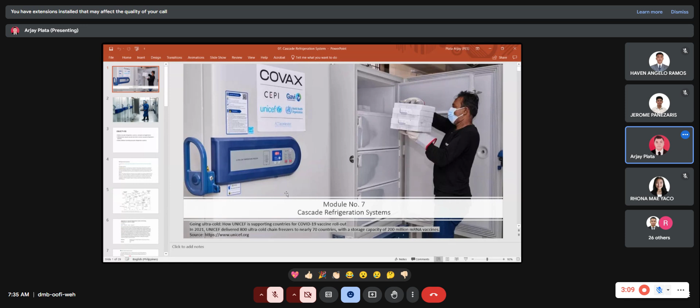As you can see on our screen, this is another example of ultra cold chain freezers delivered by UNICEF to Ukraine to increase capacity to receive, store and distribute large quantities of COVID-19 vaccines. It requires ultra cold storage. This type of freezer uses two independent systems or two refrigerants in order to achieve the ultra low temperature.

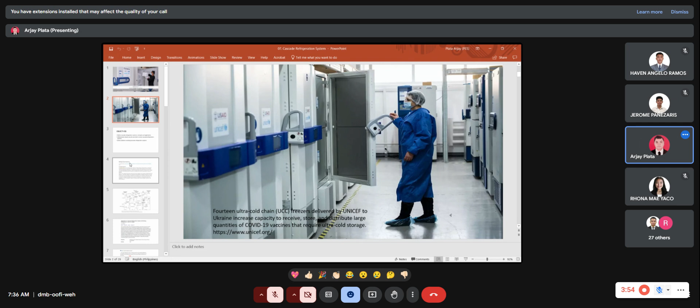Our objectives for today: first, define cascade refrigeration systems, concepts and application; differentiate closed cascade and direct contact cascade refrigeration systems; and solve problems involving cascade refrigeration systems. That's our objective for today.

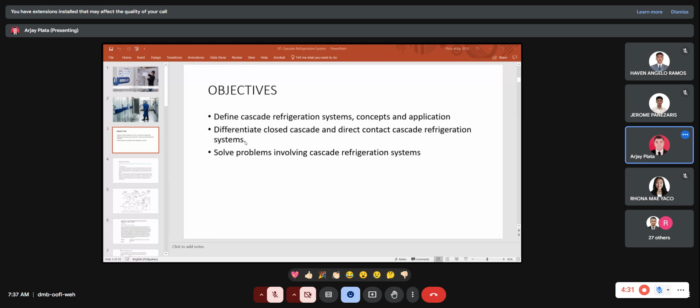As I have said, cascade systems use one refrigerant to condense the other primary refrigerant that is operating at the desired evaporator temperature. It means that it uses more than one refrigerant. This approach is usually used for temperature levels less than negative 80 degrees Fahrenheit when light hydrocarbon gases or other low boiling gases and vapors are being cooled. To obtain the highest overall efficiency for the system, the refrigerants for the two superimposed systems are different.

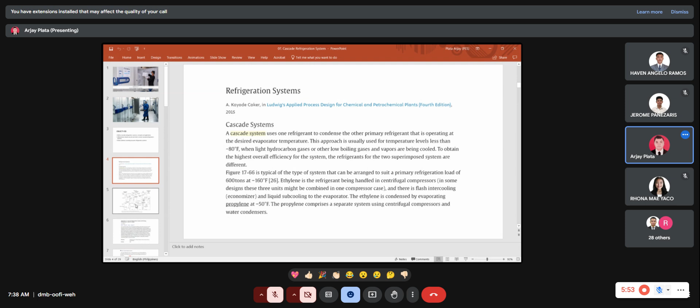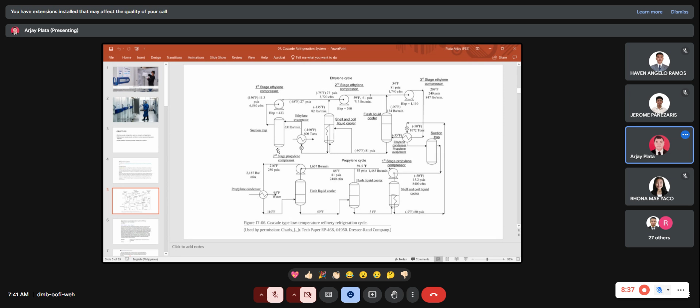There are also some studies that apply cascade refrigeration systems, which I provided in our module. The first one is the application of cascade refrigeration systems with mixing refrigerant in cold air cutting, published in the International Journal of Modern Physics B. You can also check other studies that apply this cascade refrigeration system.

In this study, it is a mechanical cutting process. In the mechanical cutting process, replacing the traditional cutting solution with cold air can avoid pollution of the environment. In order to refrigerate efficiently and flexibly adjust the temperature of the cold air, it is necessary to use a cascade refrigeration system to supply cold quantity for the compressed air.

The introduction of a two-component non-azeotropic mixing refrigerant into the cryogenic part of the cascade system can effectively solve the problems of the system working at too high pressure and the volume expansion of refrigerant when the cascade refrigeration set is shut down. So in this study, they use a two-component non-azeotropic mixing refrigerant in the cryogenic part of the cascade system to solve the problems of the system working at too high pressure.

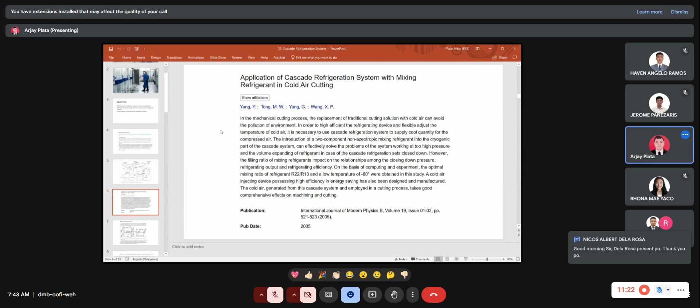Okay, so what is a cascade refrigeration system? As you can see here on our diagram, we use two different refrigerants, R134A and R22. The cascade refrigeration system is a freezing system that uses two kinds of refrigerant having different boiling points. So if, for example, we require a very low, ultra low temperature, we will use a refrigerant that can handle that temperature, for example, R22. On the other hand, if the temperature requirement is not too low, we can use R134A.

So this is the schematic view and P-h diagram of these systems as shown. You can see these are actually two vapor compression refrigeration systems that are combined by a heat exchanger. So dalawang system siya na kinombine ng heat exchanger as you can see here.

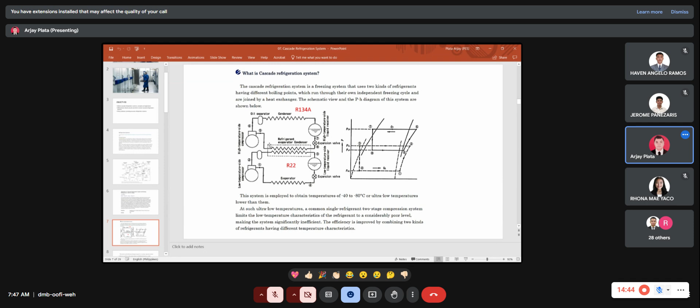Okay, so this system has the following advantages compared to a two-stage compression system. First, energy is saved because the system allows use of refrigerants that have suitable temperature characteristics for each of the higher temperature side and the lower temperature side. Next, it allows stable ultra-low temperature operation, and the running cost is inexpensive and repair is easy.

In a cascade refrigeration system, the higher temperature side uses a normally used refrigerant: R404A, ammonia, and others. The lower temperature side uses R23, which is a hydrofluorocarbon refrigerant. So yeah, you will normally use these refrigerants when we are solving sample problems: R404A, ammonia and others, and R23 for the lower temperature side.

Also, in this cascade, we can save energy because the system allows the use of refrigerants that have suitable temperature characteristics, meaning the characteristics of the refrigerants that we use, for example R404A, are maximized, meaning they are suitable for that system.

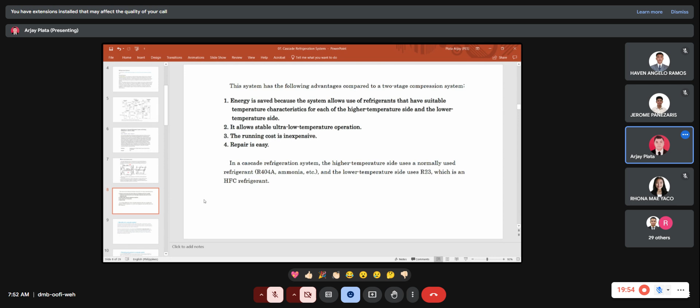Okay, so wait lang ha, I'll be back after 2 minutes. Okay, so thank you for waiting.

So let's discuss the benefits of a cascade system. A cascade system offers specific advantages over other cooling methods. When a cascade system is used, the compression ratio of each system decreases. Volumetric efficiency is therefore increased in each stage by the same effect, so the system as a whole becomes much more efficient. At the same time, it should be noted that the cooling system also requires less compressor displacement.

Okay, so as we solve sample problems, we will realize these advantages of the cascade system. We will notice that volumetric efficiency is increased in each stage, and yeah, the whole system becomes much more efficient.

Furthermore, the discharge temperature in the cascade system is lower than a single stage system. This effect is advantageous for lubrication and oil temperature. It should also be noted that high pressure refrigerants are also used in cascade refrigeration systems. If we use high pressure refrigerant, it causes the suction pressure to reach positive values. This means that this type of system does not need to work in a vacuum, even in cases where saturated suction temperature is quite low.

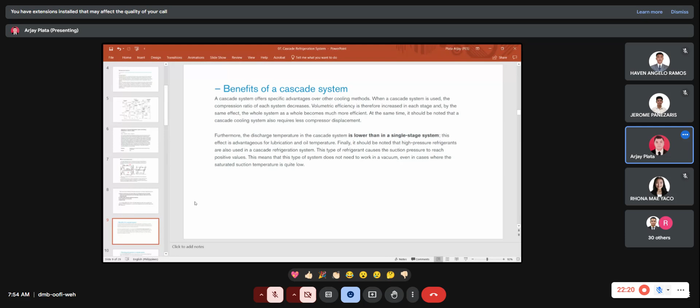As I have said, when we use the right refrigerant, as what we are doing in the cascade system, it causes the suction pressure to reach positive values. In this case, we will avoid the burnout of compressors, because the compressors don't need to work in a vacuum where the suction temperature is quite low. Okay.

Just to add, there are some precautions in cascade system. A number of precautions should be taken when using a cascade system. The first to bear in mind is that this system has certain application limits. So meron din siyang limitations. So dapat ma-monitor natin yung lubrication condition ng system natin.

It is also necessary to check that no liquid is being sucked into the system. That's what we are doing previously, avoiding the liquid being sucked into the system. In the case of low temperature systems, it must be ensured that the return gas temperature does not fall below -60. This is important in order not to damage the cast iron compressor. It is also advisable to monitor the oil temperature so that it has the correct viscosity level.

What I am mentioning are just operating precautions when we are applying cascade system. With respect to the oil, there must also be a high efficiency and well-dimensioned oil separator. It should be noted that if it does not return, it is very likely that de-icing cycles will be necessary to increase suction pressure and mass flow. Okay, so yan yung mga precautions ng cascade systems.

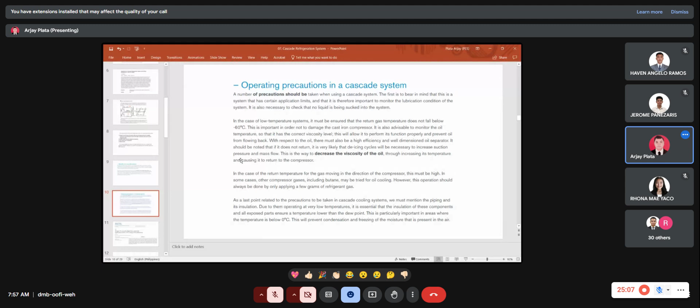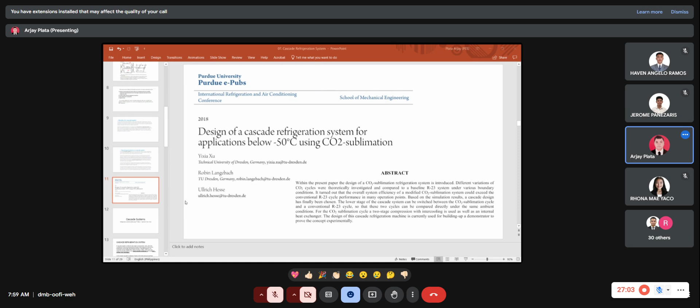For our problem solving, we will use this reference, Refrigeration and Air Conditioning, third edition by Santa Maria. A cascade system combines two vapor compression units, with the condenser of the lower temperature system discharging its heat to the evaporator of the high temperature system. So two vapor compression system siya na pinag-combine with a heat exchanger. Cascade systems can normally furnish refrigeration down to negative 100 degrees Celsius.

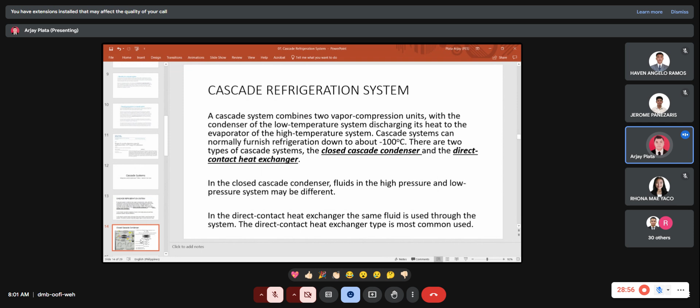There are two types of cascade: closed cascade condenser and direct contact heat exchanger. Please remember these two types. In a closed cascade condenser, fluids in the high pressure and low pressure system may be different, while in the direct contact heat exchanger, the same fluid is used through the systems. The direct contact heat exchanger type is most commonly used. So what's the difference between the closed cascade condenser and direct contact heat exchanger? Ano yung pinagkaiba ng dalawa? Unahin natin yung closed cascade condenser.

So yeah, this is the diagram of a closed cascade condenser.

So we have mass flow rate of refrigerant in the low temperature unit. We have the typical four basic types. We have low stage compressor, then going to cascade condenser, cascade condenser. And then the expansion valve and then evaporator.

So this cascade condenser exchanges heat. The heat coming from the R22 is being absorbed by the R134A. So two refrigerants moving in two different systems. There is a closed system, two closed systems, so there's heat transfer only here at the cascade condenser. The heat coming from the R22 is being absorbed by the R134A, but there is no connection between these two systems, except for that heat exchanger or condenser.

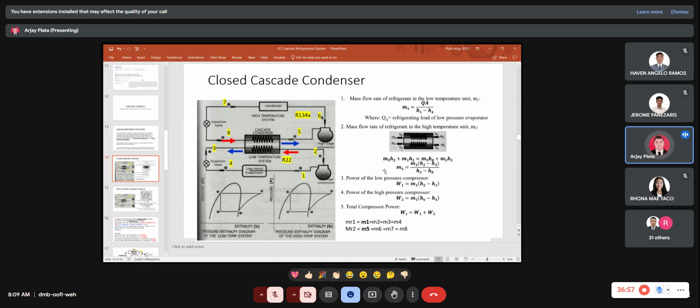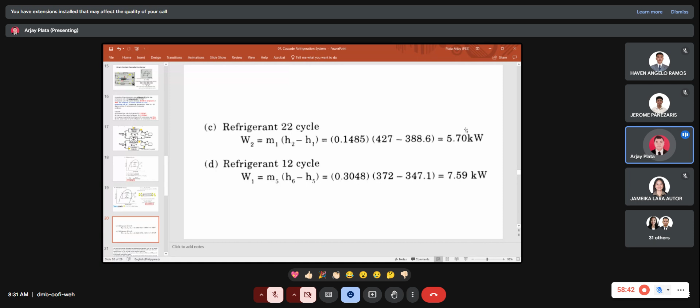By the way, parang mali yung nilagay natin kanina dito. 5.7 lang. 5.7 pala to. 5.7. Ito ay 7.59. Yan. Okay.

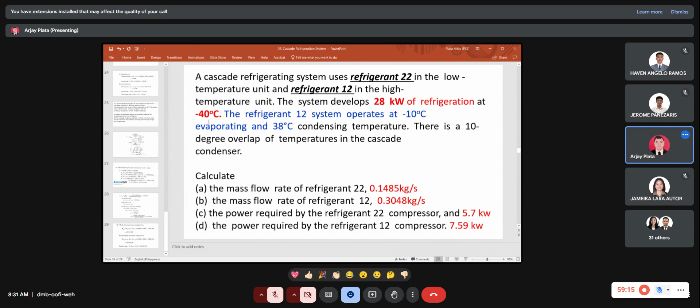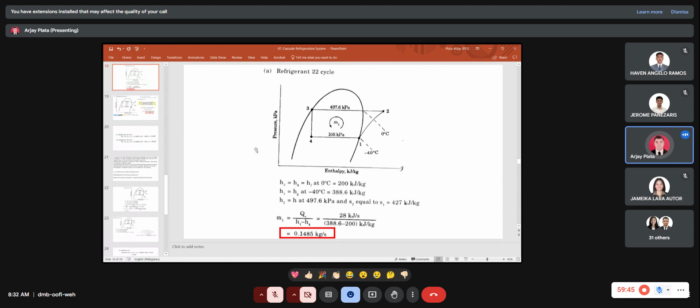So we have another example here. Yung na-discuss natin previously is a closed loop, and this is closed loop. And then next problem is let's have some cascade, direct contact cascade.

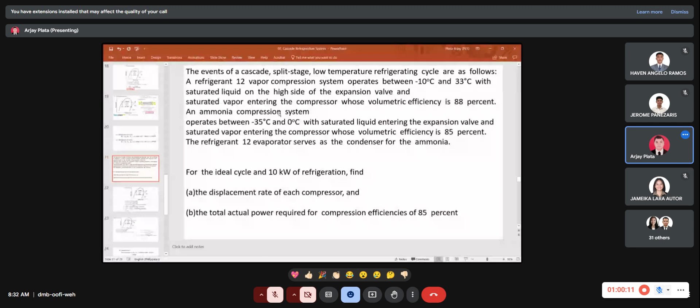So in a certain refrigeration system, for low temperature application, a two-stage operation is desirable, which employs ammonia system that serves a 30-ton evaporator at negative 30 degrees. So the system uses direct contact cascade condenser. As you can see, only one refrigerant is used, which is ammonia. So in this case, we will apply direct contact cascade condenser.

So sometimes it is specified on the problem, sometimes not specified, but if you see that there's only one refrigerant, then it's for the cascade, then it is direct contact. So ammonia system employs a 30-ton evaporator at negative 30 degrees. So the system uses a direct contact cascade condenser and the condenser temperature is 40 degrees Celsius.

Find the following. A. Sketch the schematic diagram of the system and draw the complete process on the ph diagram. B. Cascade condenser pressure in kilopascal for minimum work. C is mass flow rate in the low and high pressure loops in kilogram per second. And D is the total work. Yeah, so solve for this.

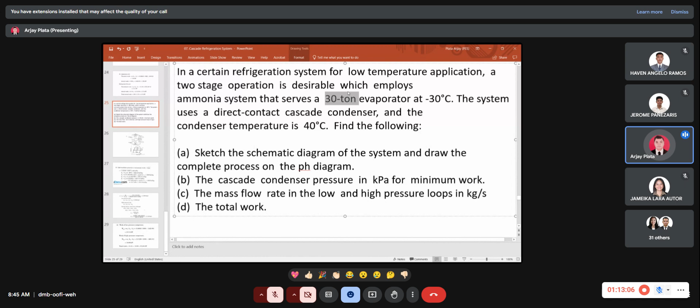Okay, so yeah, we have to solve for these enthalpies. Then compute for the mass flow rate. So we are given, what's the given refrigerating effect? 30 tons of evaporator. 30 tons. So convert the 30 tons to kilowatt, then divide it by the enthalpy. Convert it to kilowatt and then divide it by H1 minus H4.

So we can get M1, which is equivalent to M2, M3, and M4. We have 0.0863 kilogram per second. High pressure loop, M5 equals M6 equals M7 equals M8.

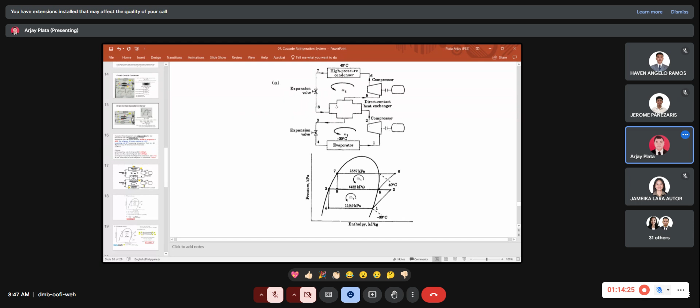So to get M5, we have to perform energy balance at the cascade, direct contact heat exchanger. So this is our equation earlier for energy balance. M5 equals M1, let's see if we can use this equation.

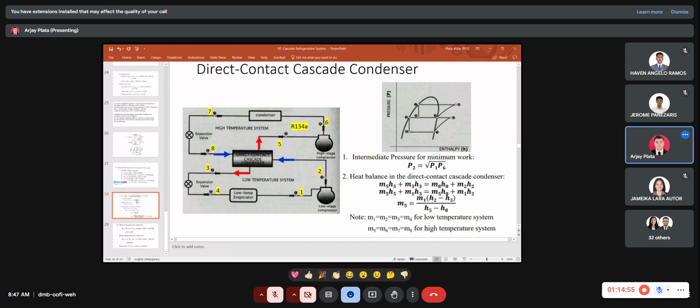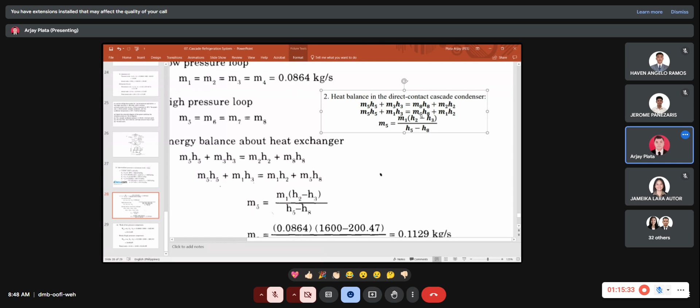This is the equation we had earlier for energy balance at the cascade: M5H5 plus M3H3 equals M8H8 plus M2H2. So this is the same equation we'll use. So we have M5 equals M1, which is 0.0864 times H2 minus H3 over H5 minus H8, equals 0.1129 kilogram per second.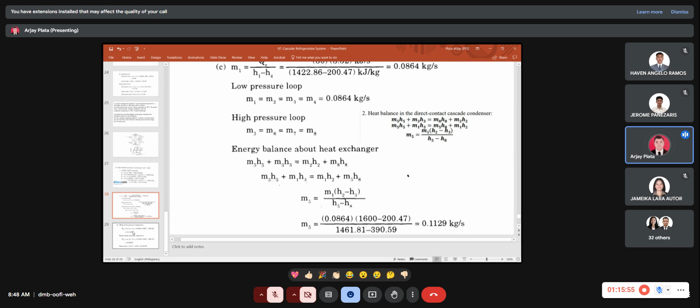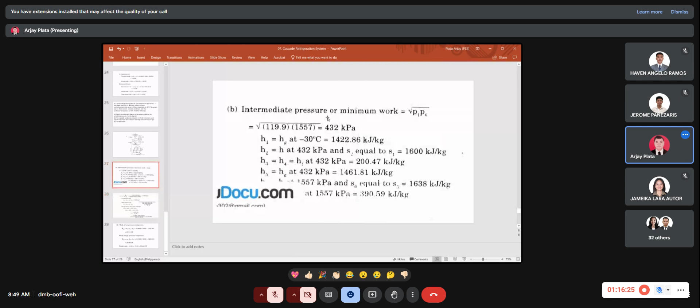Okay, so we already have the mass flow rate. So we just have to compute for work of compressor: mass flow rate times H2 minus H1 for compressor 1. And then for compressor 2, this is for the low pressure compressor, H2 minus H1. And this one, H2 minus H1, and then H6 minus H5 for the high stage compressor.

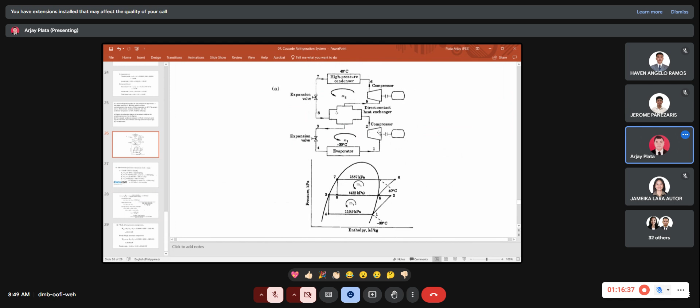So we will get 15.31 kilowatt for the low stage compressor, and then 19.89 kilowatt for the high stage compressor, using different mass flow rates: M1 for the low pressure and then M5 for the high pressure. So to get the total work, we have to add the high pressure work of compressor and the low pressure work of compressor. So total of 35.20 kilowatt.

Okay, so do you have any questions? Did you understand our discussion today on cascade refrigeration systems?